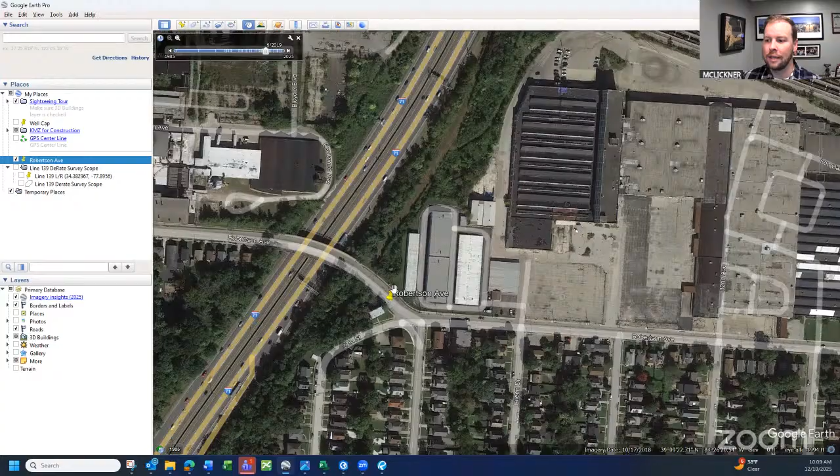So for reference, this project is a natural gas regulating station and metering station for Duke. There's an existing station within the sidewalk at this location that is being expanded to increase the capacity in this area, as well as add some additional metering capacity.

The site that we've selected is next to this existing Life Storage site here on Robertson Avenue, right next to Highway 71. This is right on the edge of, I believe, the Norwood and City of Cincinnati border on the city side, and we're ultimately fitting in somewhat in this little portion here.

I've got another drawing we can see just to show what the entire site looks like. But again, this is a natural gas regulating facility for a utility with some above-ground appurtenances or features, which is ultimately why we're seeking relief on our security fencing for both the height and conditional use for the razor wire. So just a general look at what is existing at this location prior to construction.

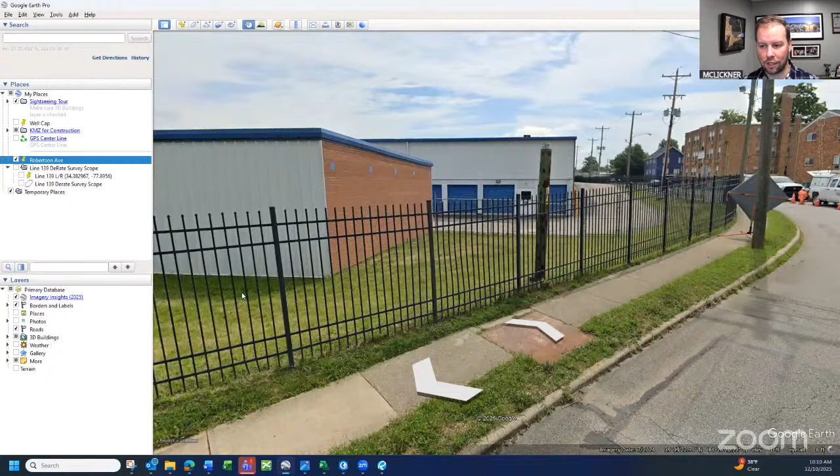So again, this is the Life Storage facility - there is some existing fencing and barbed wire on the interior of the site that is visible from the roadway. There's a black fence here that has been removed as part of the construction of this site. The site was previously permitted for construction and is under construction now, so this is not what it currently looks like.

There are some residences in the area which we've been in communication with, particularly this apartment building across the street. But yeah, this is generally the existing conditions we're looking at. Just note there is also an existing access to, I believe, a wastewater, water, and gas line right-of-way, which does include some taller fencing with barbed wire - so just noting it's not brand new to the area.

And to give you another look at the area - from Life Storage looking out, just to give you an idea of what it looks like, from essentially partially inside of the site looking out, this is what we're looking at, with Robertson Avenue right here in front of us.

The actual work being performed, as noted, is a natural gas regulating station, which is essentially inclusive of 5 pits - below-ground concrete structures that contain equipment that is typically above ground. There are also above-ground meter runs that were required as part of our metering scope for this work.

The bulk of this station, outside of a few above-ground appurtenances, will be below ground at the end of the project. From a security standpoint, which is fairly standard for Duke, we're looking at installing a 7-foot tall chain link fence with 1 foot of barbed wire on top, including privacy slats. The scope of that fencing runs from the edge of the building around to tie into an existing set of fencing.

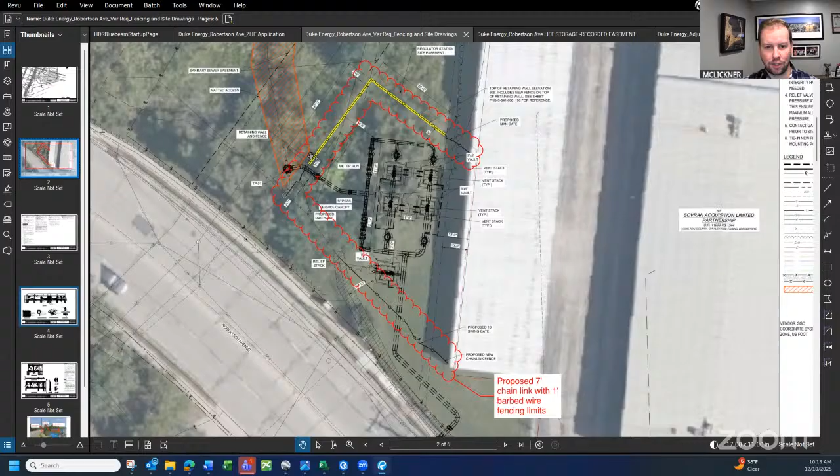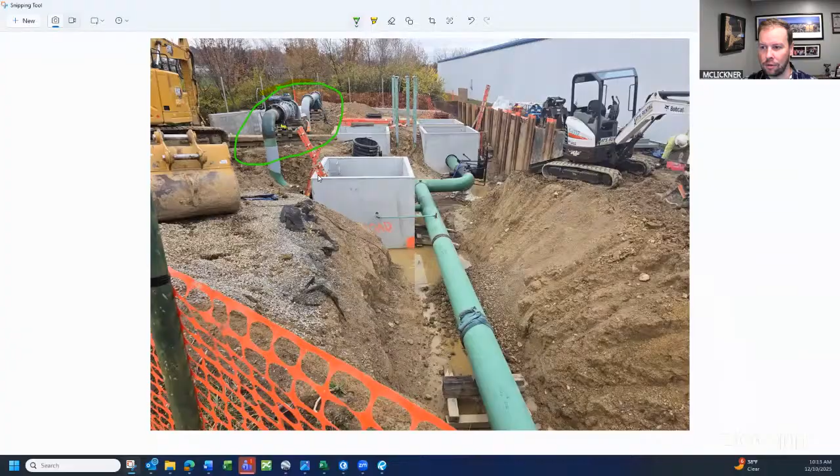Here's a quick look at the site in construction, just for reference. These are the above-ground appurtenances I'm talking about, which are ultimately part of what we're looking to protect with this fencing, along with a few vents coming out of these pits. At the end of the day, these two items will be sticking out; everything else will be at grade or below grade, as permitted through the site development plan with the city.

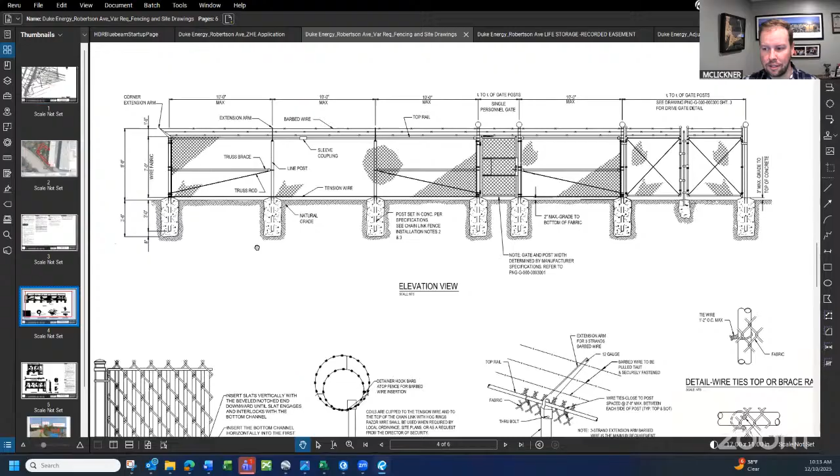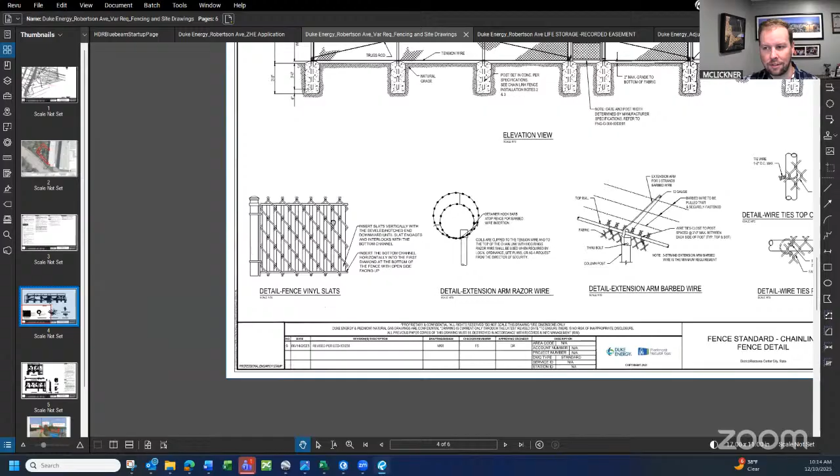So the scope of the fencing we're looking at is Duke's standard security fencing detail: 7-foot tall wire fabric with a 1-foot extension on top for barbed wire, as well as vinyl slats included for privacy. The intent is that this privacy fence with barbed wire would run along the front edge of the site from the corner of the building to tie into the existing fencing along Robertson Avenue, then back along the back edge and side edge of the site.

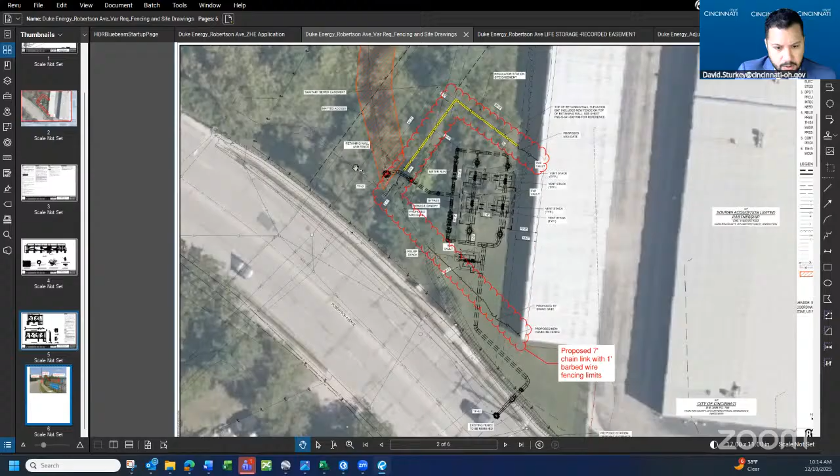Question: the existing fencing to the northwest of the new proposed fencing—is that the fencing shown earlier that already has chain link and barbed wire? Answer: It ties in right about this location, from the black fencing to chain link. So it actually stops the black decorative fencing and becomes chain link.

So ultimately we'd be tying into the chain link, since the black fencing has been removed. Question: where it ties in, did that chain link recently have barbed wire on it as well? Answer: I don't believe the chain link along this edge had barbed wire. The gate a little farther down does have barbed wire, but the chain link fencing that this existing fencing ties into does not.

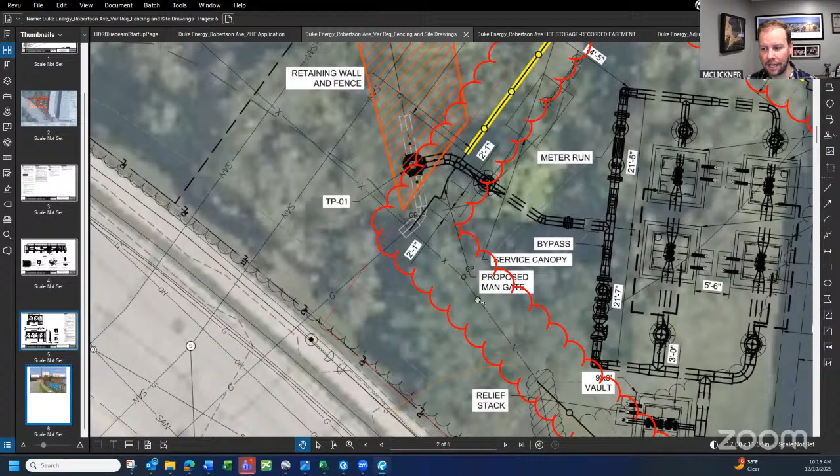Yeah, okay, thanks, I've got another. I do have a photo, you can kind of see it, it's a little tougher. For some reason it didn't load the right half of the picture I've got here, but there is barbed wire again on the gate, not on the existing fence. Got it, okay, thank you.

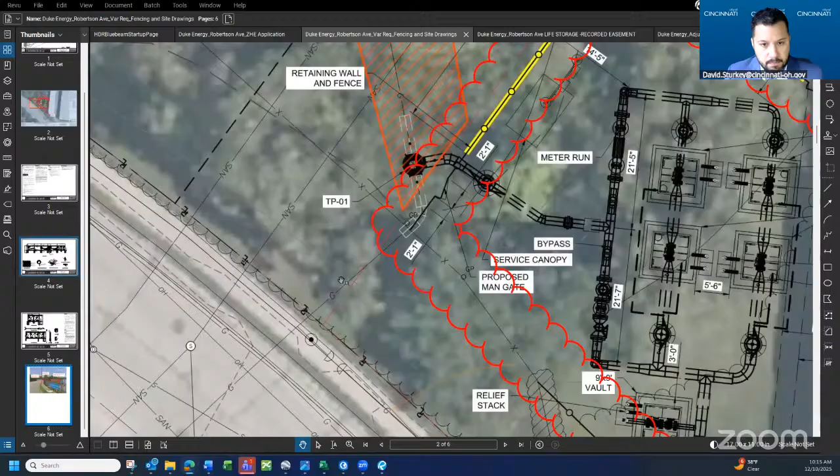So that is the scope again that we're looking for here. There will be a driveway in front of this fence, which was permitted as well, with a drive into the site here. There is also a proposed 16-foot swing gate set here to be installed. So that's the scope of the work we're looking for.

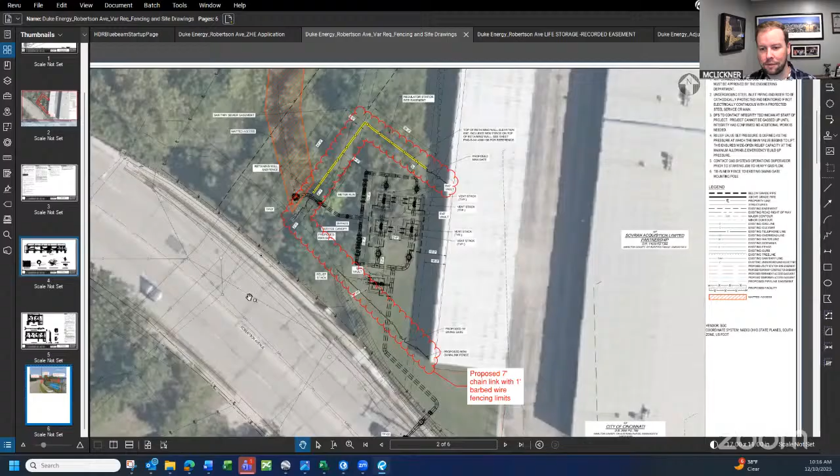Let's see if there are any additional questions before jumping into the support for the case. Question: How far set back from the right of way will the new fencing be? Let me scale this off real quick—maybe it's 1 to 10.

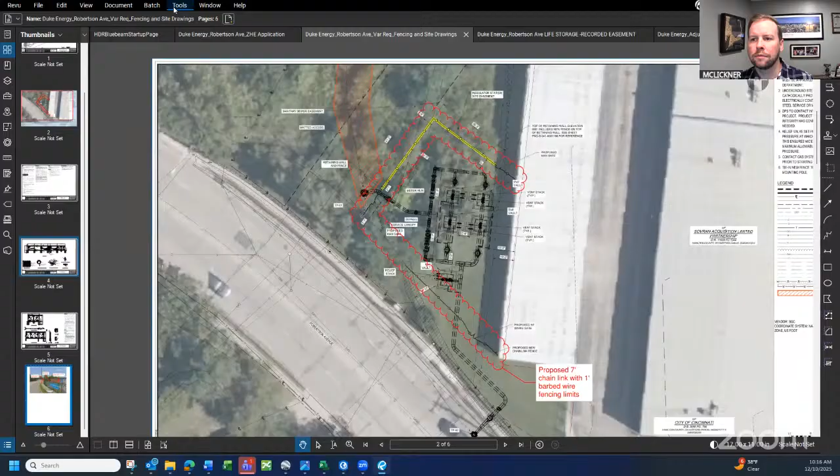Take that. I got that scale right.

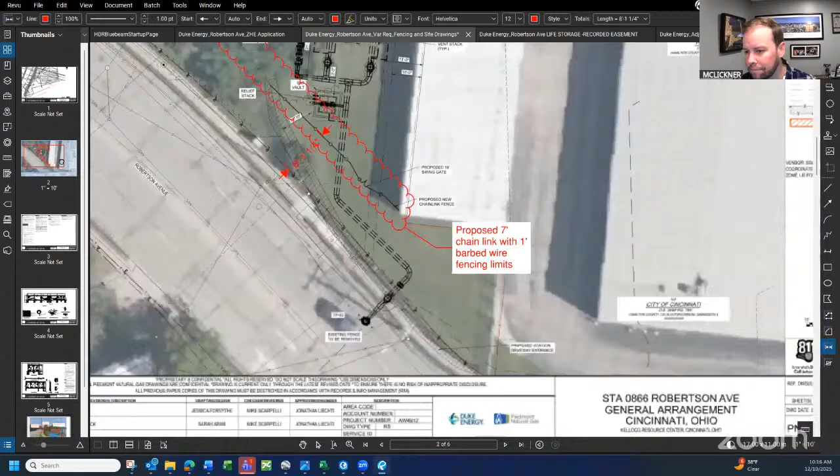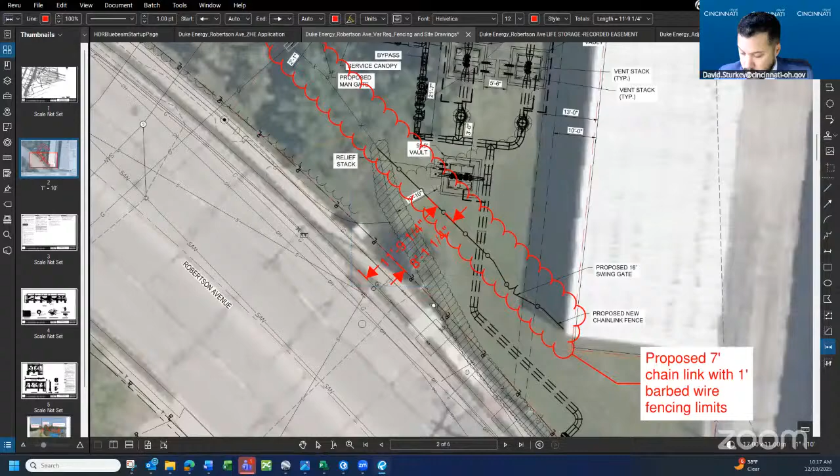Right now it's 8 feet to the property line. We can go to the edge of the curb, to be 12 feet back from essentially the edge of the sidewalk road. 8 feet off of where the road right-of-way is there.

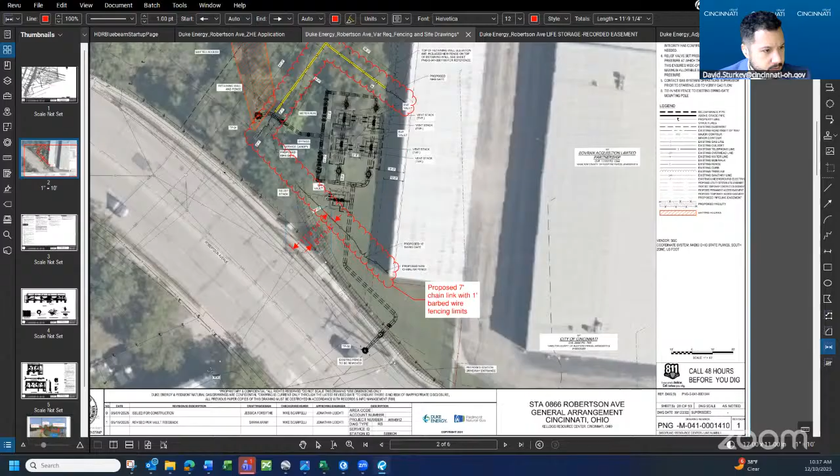You mentioned at the beginning you had been in contact with neighboring residential properties. Is there something in the packet that references those communications, or would you like to share what those have been?

The communication with the neighbor across the street has been more specifically about the work, and there'll ultimately be an outage as they tie in the new station to the service line. So the communication has not been specific to a fence across the street.

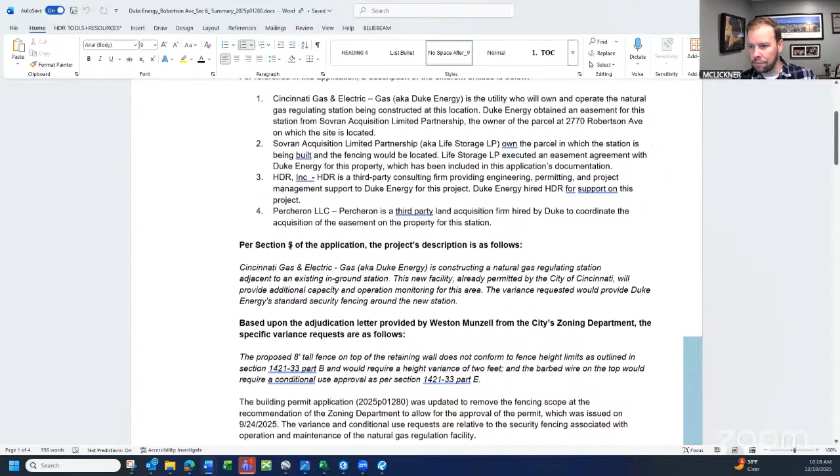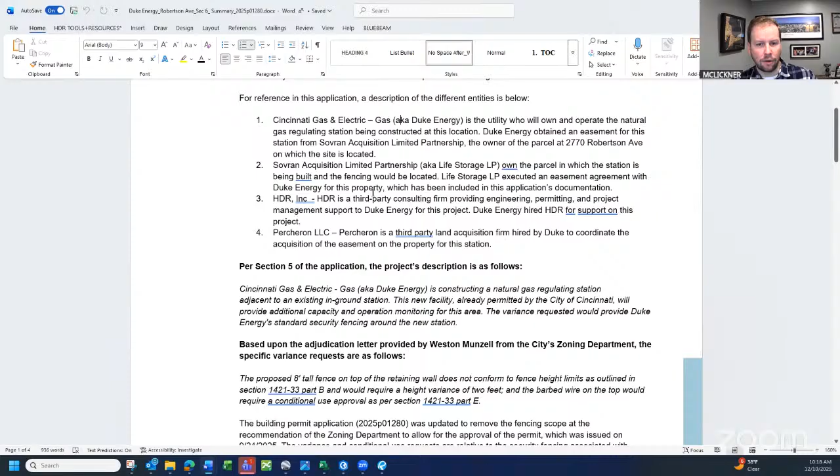I do believe I have in here, let's see if I can find it. There have been communications with Life Storage, who is ultimately the landowner that this easement was purchased from, and their preference is to have a fence protecting the station as well. From a liability standpoint, they would prefer that this station be protected from the general public, from someone wandering in or trying to break in.

So the landowner that this easement is on, their preference is to have this station protected. I'll have to read to see if I can find where I wrote that down.

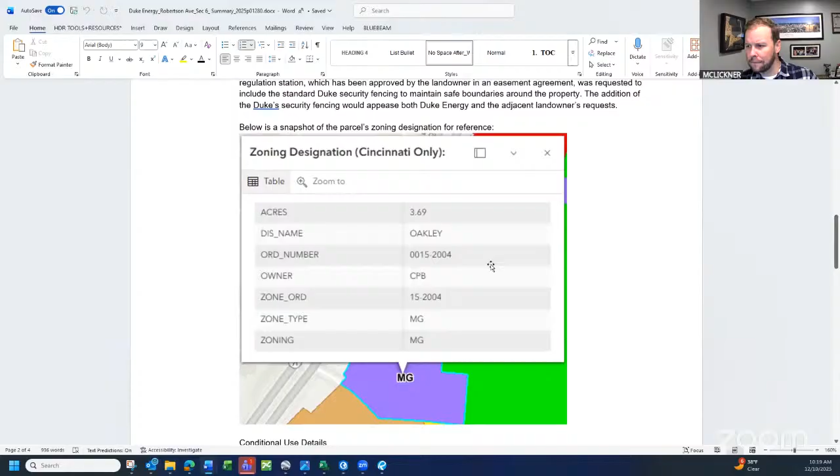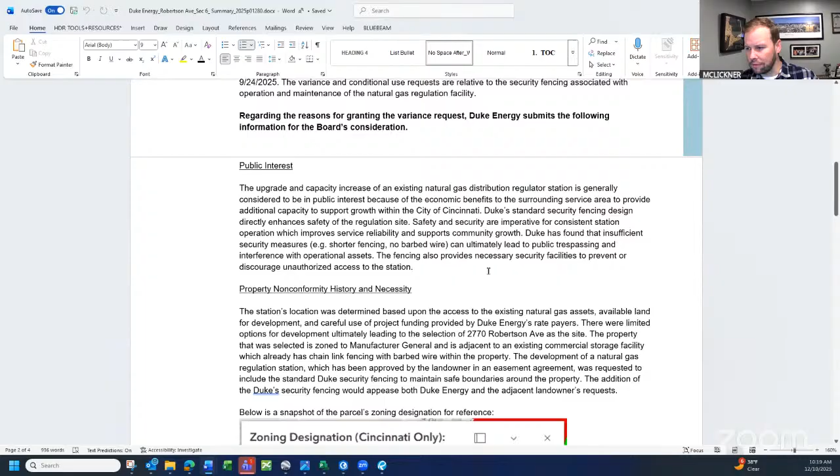If not, I can provide it additionally. I've got one of the witness list people who was a right-of-way agent who had that communication with the landowner. We need to grab him and pull him in. I can check his availability as well.

I think we can hold off for now. Is there anything else you wanted to tell me about the project? I don't believe, not specific to the project itself. That's generally the work that's going on and planned.

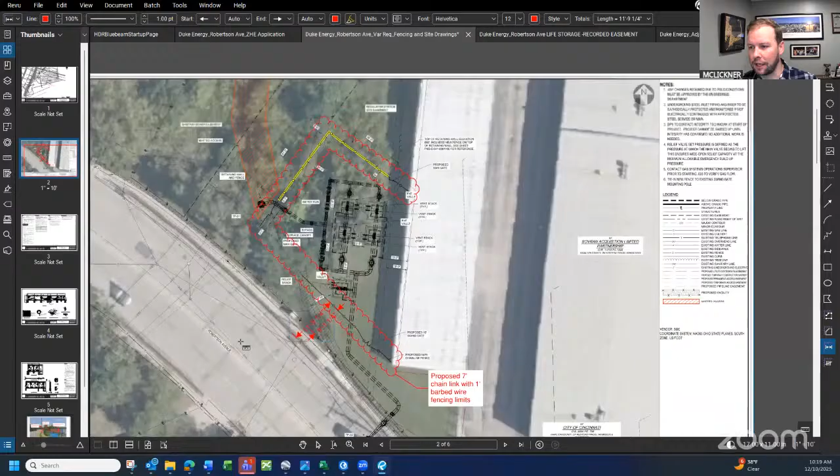I think I mentioned we do have a couple of gates being installed, just for noting the scope. There's a drive gate at one location and then two man gates for access and emergency escape, essentially, for both of those locations.

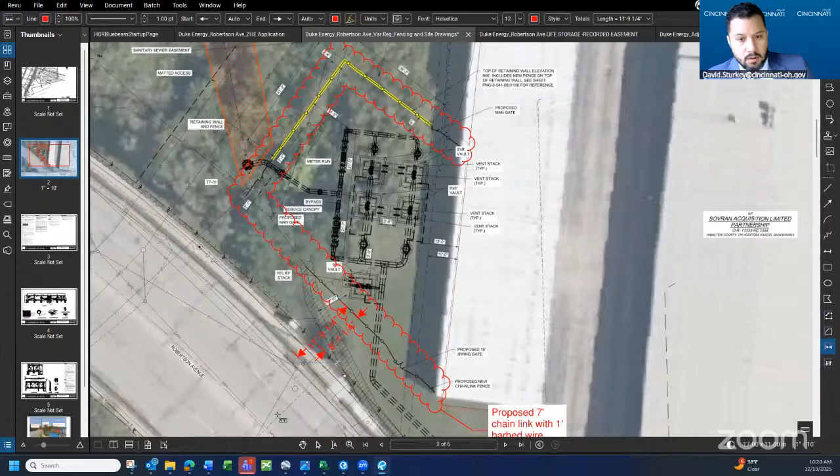All right, I don't think I have any more questions. Was there anyone else from the applicant side that wanted to add anything to the conversation here? Yes, sir, I did have one thing I wanted to add.

I did reach out to our Duke physical security manager last week, and I spoke with him about this project. He brought it to my attention that there are two other Duke facilities about 2.5 miles from here that were put in within the last few years.

One was for the C350 project. The other one was the Norwood Regulator Station project. Both of those sites are significantly larger than this site, and they both were approved to have the 7-and-1 chain link with privacy slats. I'm happy to try to share my screen to give you a visual if that would be helpful.

Do you know if they were in the city of Cincinnati? I believe so, I believe they were within the city limits. Did they go through a variance process, do you know? I'm not sure. I've not contacted the project team that were on both of those projects.

Let's see. I apologize, we typically work off of Microsoft Teams. This is the first time I've used Zoom.

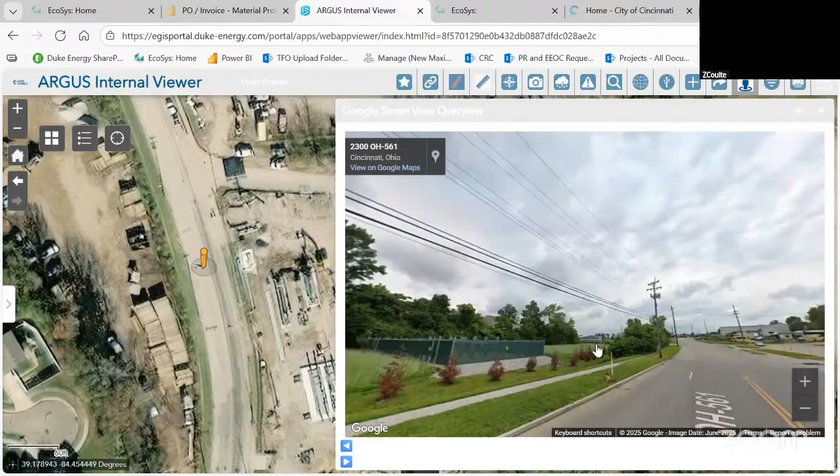These are essentially 5 different lines that we have above ground mainline valves on. And then back here, we do have a building, and I believe there is a fence around this building as well, a 7-and-1 chain link with the privacy slats.

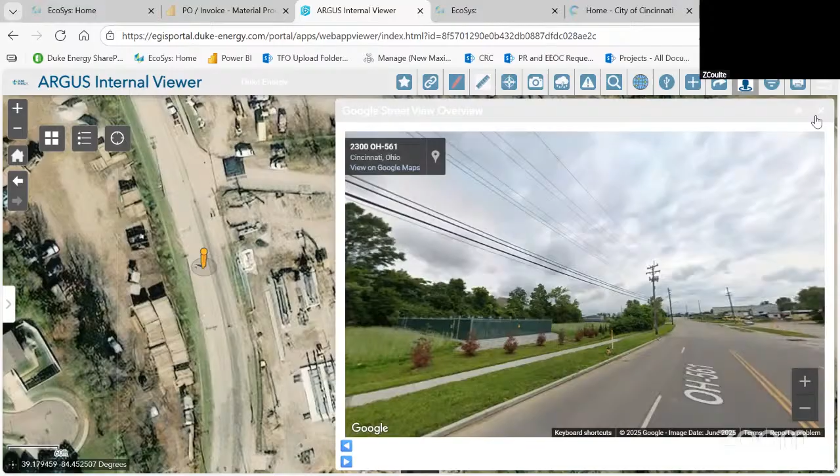And as far as locations go, zoom out, give this a second to load.

Yeah, I think when I looked it up using Apple Maps, it was 2.4 miles from this site. This is where the Robertson Ave site is. Yeah, you can kind of see there. But I do believe it is in the city of Cincinnati boundary.

Hamilton County. Cincinnati is a municipality. That's it, I just wanted to share that. That was something that he had brought up.

I was trying to seek approval for the approved 6-foot chain link fence. Their biggest concern is obviously security and trying to keep the public safe, as well as the customers on this line. This is a critical station. So if this station was ever sabotaged, we would have residential and industrial customers with services interrupted.

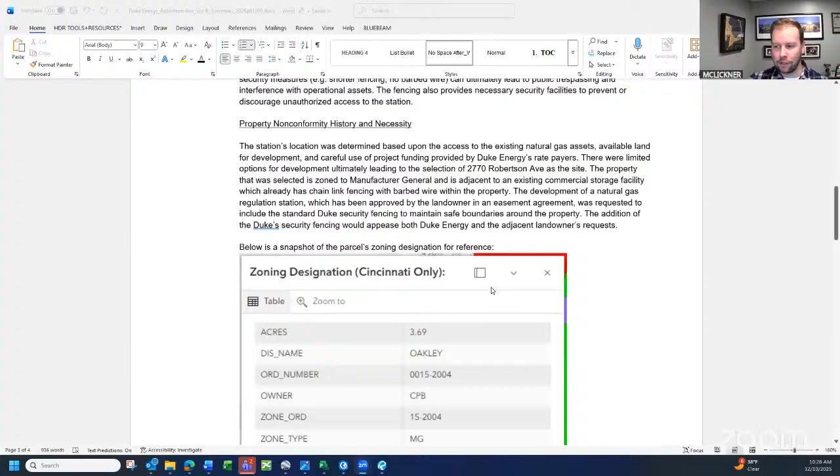But if you've got that on record and read it, then we're all good. Tried to hit the right points there for our support. Sure, okay, great, let's go over to Wes. Wes, you want to add anything here? Unless you're on mute.

Good morning, I do not have any more comments other than the staff report as presented. Okay, great, thanks Wes. All right Mr. Klickner, I don't have any more questions. So anything you want to say in closing or otherwise before we adjourn here today?

We appreciate y'all putting this together and taking a look at the variance for both the height and the conditional use. These are, again, critical infrastructure items, both for public safety and customer safety and customer access to the natural gas. We'd very much like to have the variance to be able to install the fencing as proposed. But again, appreciate the time this morning.

Great, yeah, I think we can leave it at that. As I said, I've reviewed the application materials and the staff report for this application, and based on that and based on the testimony I've heard here today, I agree that it would be impractical to strictly enforce the zoning code to this application. So I am going to approve the requested relief.

I need to formalize that approval in a written decision. I mentioned at the beginning that typically takes about 2 weeks. I think that's a good estimate based on my current queue of applications. As soon as I finish that, I put it into a PDF and email it to everybody in the hearing today, so you'll all have a copy moments after it's complete. Once Wes sees that email, he can approve the zoning permitting on his end, and you all can take the next steps. Any questions about any of that?